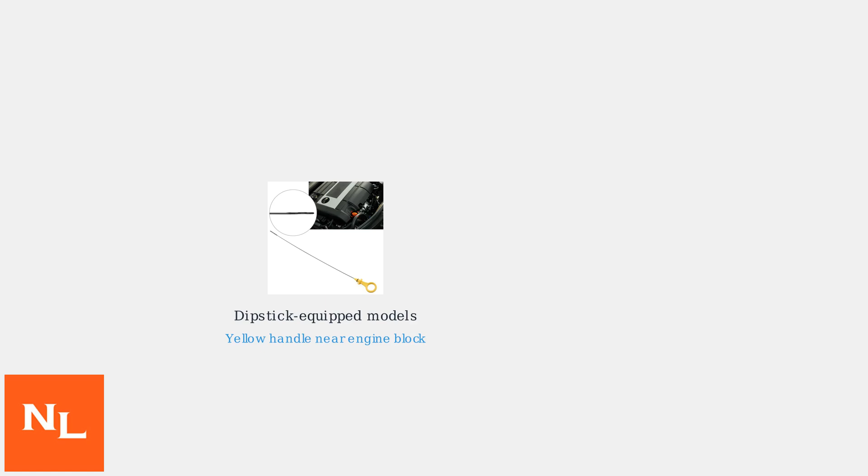Dipstick-equipped Q3s have a yellow-handled dipstick located near the engine block under the hood. Electronic systems are accessed through the vehicle's MMI display in the dashboard. To determine which system your Q3 has, visually inspect the engine bay or check your owner's manual.

Park your Q3 on level ground and turn off the engine completely. Wait 10 to 15 minutes to allow the oil to settle back into the pan. Locate the dipstick under the hood, typically with a yellow handle near the engine.

Pull the dipstick out completely and wipe it clean with a cloth. Reinsert the dipstick fully into its tube. Remove the dipstick again and check the oil level against the minimum and maximum marks. The oil level should be between the min and max marks on the dipstick.

If the oil level is below the min mark, you need to add oil.

Locate the oil filler cap, which is marked with an oil can symbol. Remove the cap and add oil gradually using a funnel. Use the recommended oil type, typically 5W30 or 5W40 synthetic. Avoid overfilling to prevent engine damage.

For Audi Q3 models with electronic oil monitoring, you can check the oil level through the MMI display instead of using a dipstick.

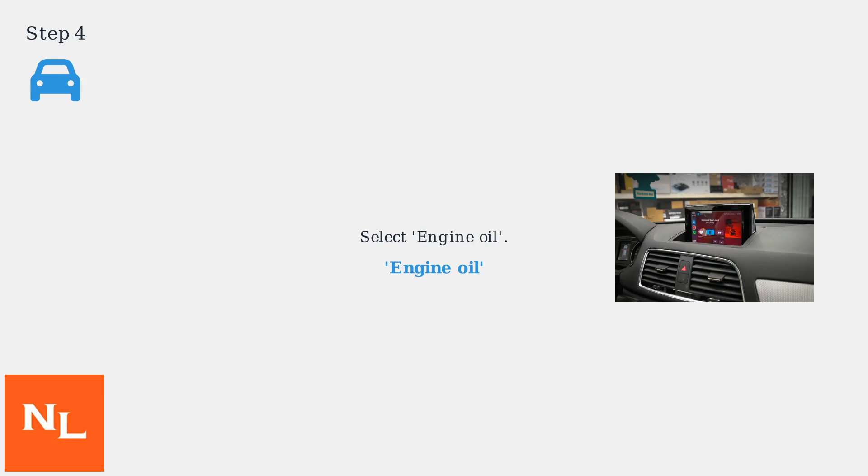First, tap the touchscreen display to access the main menu. Next, select the Car option from the main menu. Then, choose Vehicle Status from the submenu. Finally, select Engine Oil to view the oil level.

The system will display the current oil level, showing oil level OK when it's normal, or prompting you to add oil if it's low. If the electronic system indicates low oil, don't ignore it.

While sensor errors can occur, it's best to investigate. Check the MMI display for accuracy. If possible, visually inspect for leaks under the vehicle. Look for oil puddles or drips.

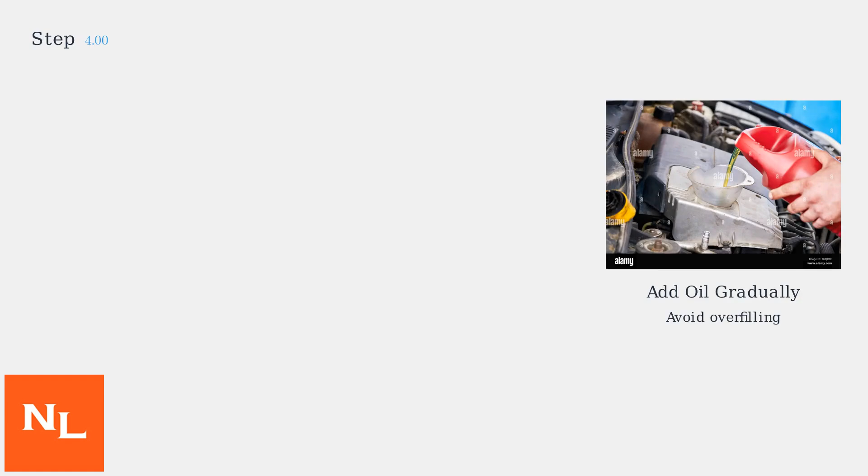Add oil as indicated by the system, but be cautious. Add gradually to avoid overfilling.

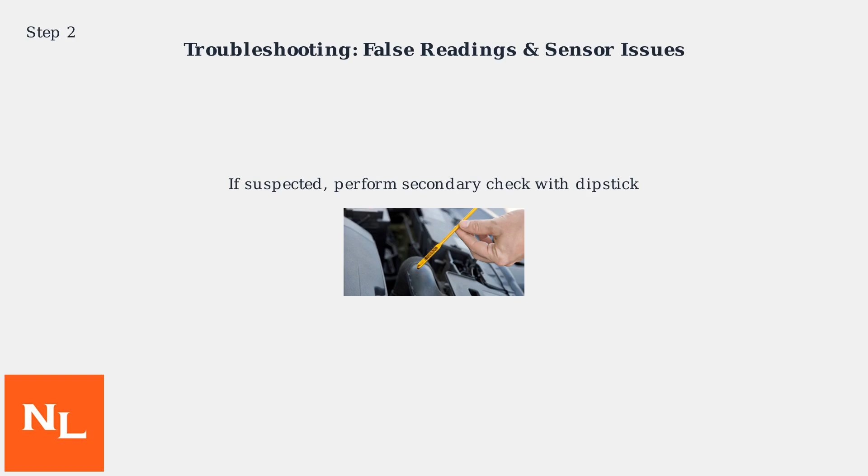Some Q3 owners experience false low oil warnings, which can be misleading. If you suspect a false reading, consider a secondary check using the dipstick if your vehicle has one. Faulty sensors are a common possibility causing inaccurate readings.

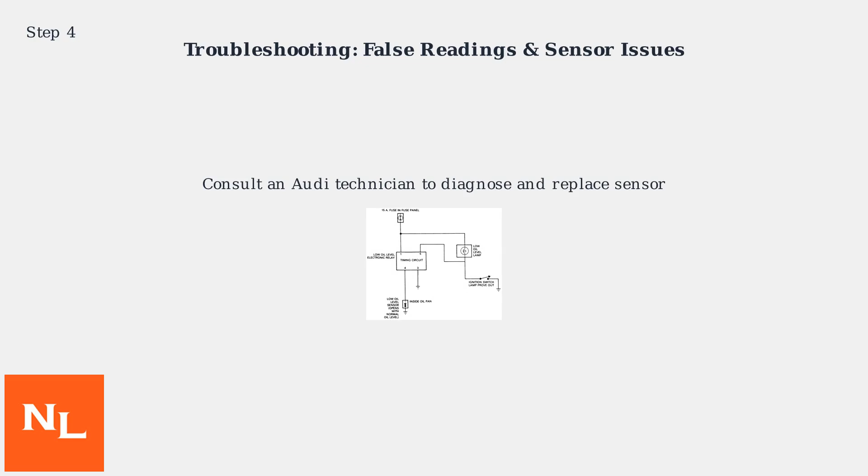Consult an Audi technician to diagnose the issue and potentially replace the sensor for accurate readings. Firmware updates may also address sensor calibration issues to improve accuracy.

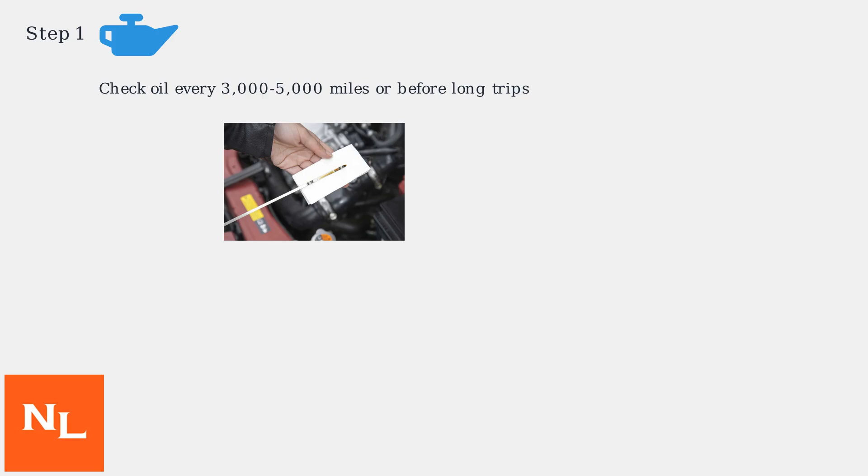Check your oil level every 3,000 to 5,000 miles or before long trips. Use the correct oil type and capacity of 4.6 to 5.7 quarts depending on your engine. Regularly inspect for leaks to prevent engine damage.

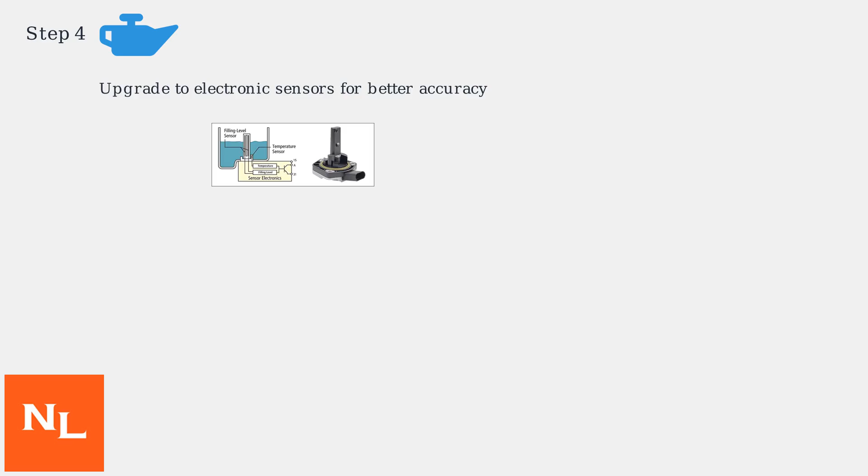Consider upgrading to aftermarket electronic oil level sensors for improved accuracy. Prioritize oil checks for optimal engine health.